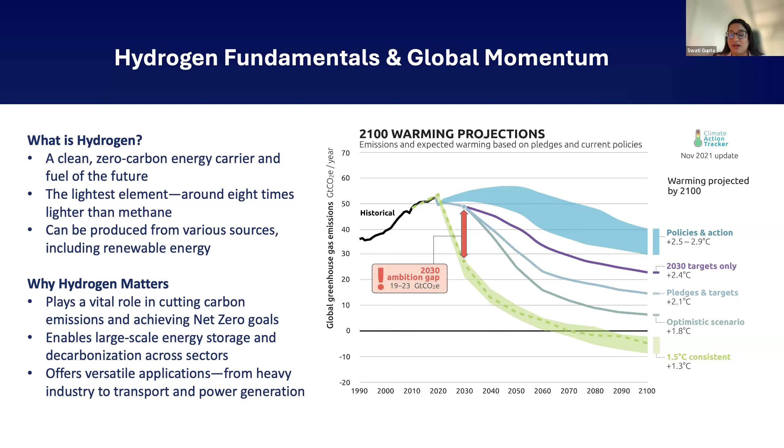Furthermore, hydrogen will offer versatile applications as well, ranging from heavy industry, transportation, and power generation, which actually makes hydrogen a key component in the transition to sustainable energy.

So the global stats is basically from the latest Hydrogen Council report, which was released recently in 2025. I think it was August or September.

That report talks about clean hydrogen, and if you look deeper, clean hydrogen is a mix of renewable energy and renewable hydrogen, which is what they're calling green hydrogen. They're actually calling it renewable hydrogen for some reason. Then the other part is blue hydrogen, which is called low carbon hydrogen. That's basically still using fossil fuel, but doing CCUS.

So there's a lot of investment committed by 2030. Why 2030? Because most countries have a net zero target by 2030. We're already in 2025, so we're not far off.

There's 500 plus projects at FID, under construction, or operating. This report is quite interesting, so I suggest everybody interested in hydrogen go through it. There's 6 million tons of capacity, and out of that, 1 million tons is already online, so that's some achievement. There are also about 50 plus projects which are cancelled or postponed, which is important to note, and that's due to market policy - we can cover that more in the Q&A.

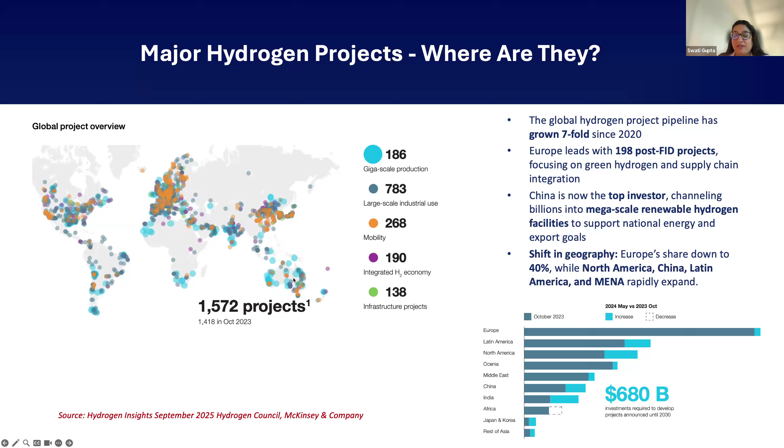So what are we looking at in terms of capacity? How much is in clean hydrogen projects? What does it look like? For hydrogen and CCUS, we talk about tons. Those from the oil and gas industry are used to cubic feet or barrels, but for hydrogen it's measured in tons.

Now, these clean hydrogen projects are what they call FEED plus projects. What is FEED plus? It's after the front-end engineering design is completed, which shows that most of them could be going online - we don't know, but there's quite a high chance. So the clean hydrogen market is seeing its first wave of mature projects, with FID, under construction, and operational investment almost surpassing 110 billion across 510 projects. So that's the stats.

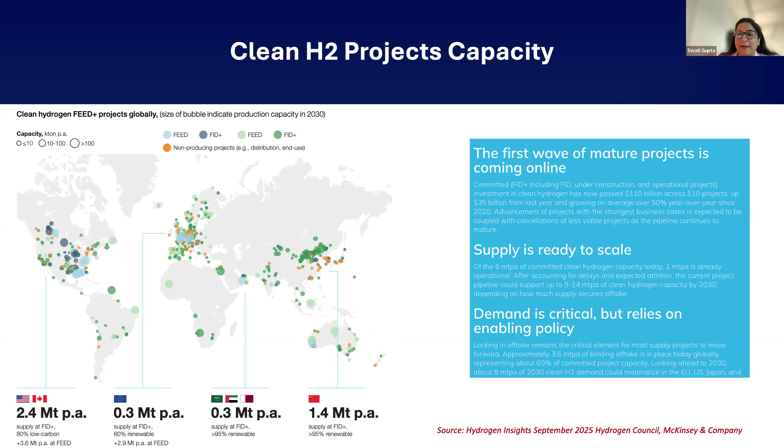So that was just a very brief introduction from the stats from the council report. Now we're going to move to different types of hydrogen. I think most of us would know, but just to give a little flavor of the different colors here.

Gray is the steam reforming of natural gas, which is the most common and the cheapest. It's produced from natural gas through steam reforming, but it emits high levels of CO2 because it's using natural gas burning. Blue is also exactly the same, but we capture the carbon using CCUS, and it's also called low carbon hydrogen generally.

Green is the electrolysis using renewable energy, and there's no emission—a true clean energy source. Either it has to be solar, wind, or any kind of renewable energy, it doesn't matter. The production cost is high. Why? Because it's dependent upon the renewable energy cost. So that is why it's high.

Black and brown is gasification of coal, very harmful. And then we go to pink, which is nuclear energy, which is also referred to as purple or red hydrogen. And then turquoise, methane pyrolysis, and that's emerging now, emitting no CO2 and producing solid carbon.

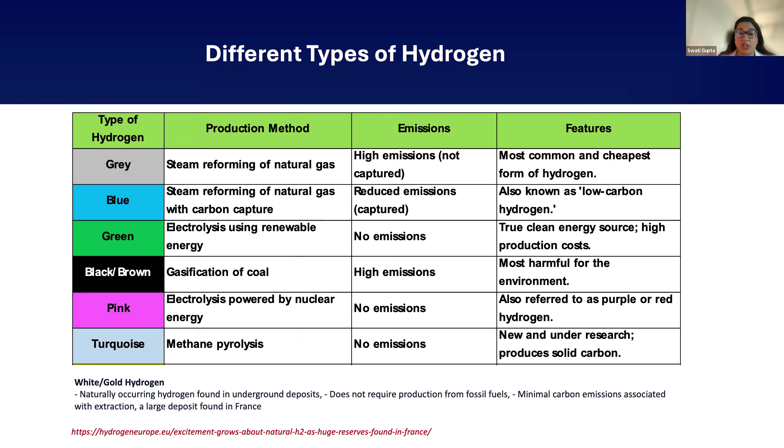And last but not least, gold hydrogen or white hydrogen, which you've probably been hearing a lot about. That is geological hydrogen, which does not require production from fossil fuels, but extracting that hydrogen will still require some form of energy, and if it is fossil fuel, then it is not really zero carbon emission. There was news about huge reserves in France, which have been making news for the geological hydrogen. Many universities are working on this.

Okay, which basically takes us to some of the storage challenges here. Why are we talking about hydrogen storage, and why is it important in the whole value chain? When hydrogen becomes the fuel of the future, it is very important to understand that it will have subsurface, surface, and regulatory market challenges, because it will be a fuel which will be stored, and it will have its own challenges on the surface, infrastructure, and the regulatory market. So we will touch upon this slide a little bit later.

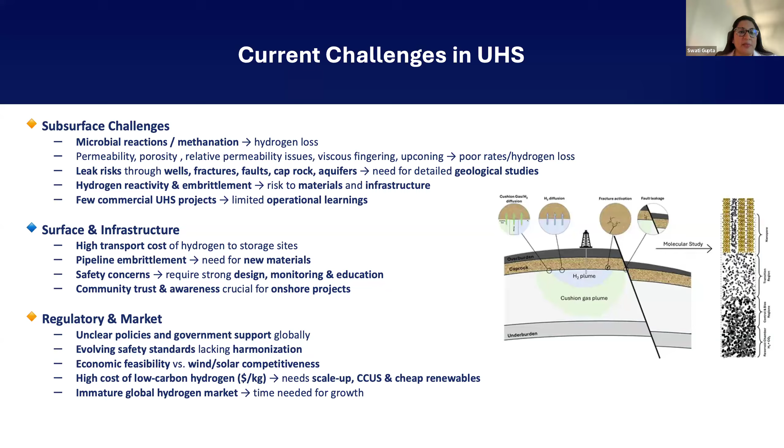Let me go to—sorry, I'm just going to look at this. Okay, sorry, I think there is some mismatch of my slides here and there, so I'm just going to go to the industrial use of hydrogen first. So from hydrogen, we understood that it is a fuel which has been used in many sectors, and it plays a vital role in several major manufacturing and industrial processes.

In ammonia production, it serves as a key feedstock for fertilizer. So that's why you hear a lot about ammonia production, and now ammonia is becoming a fuel for some of the shipping industry, and there's a lot of research going on. This is all an active area of research, by the way, since the economy will be dependent upon hydrogen—that's the assumption, so there's a lot of work going on. But saying that, ammonia is still mainly used for fertilizer production. That's the main industry.

Then again, methanol production: hydrogen is combined with carbon monoxide, and it could be carbon dioxide, and then it is used to produce methanol, which is a versatile chemical used for manufacturing different acids and biodiesel and things like that. And then in the refining industry, hydrogen is also used to remove sulfur, in what's called the hydrodesulfurization process.

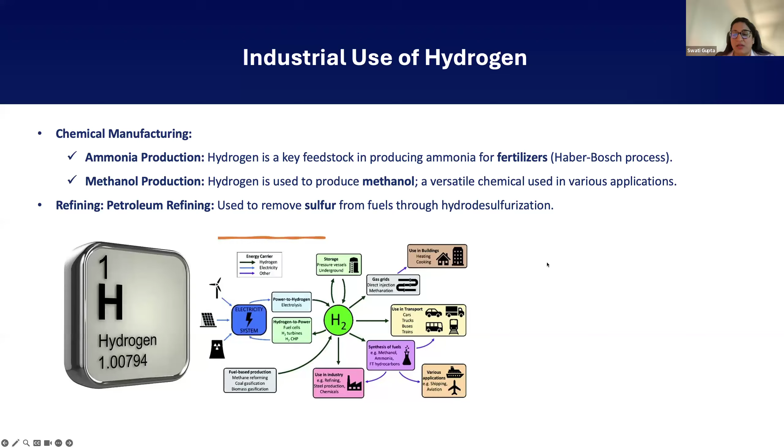Low carbon hydrogen is a slightly newer industry, and it is increasingly being adopted for various sectors like the automotive industry and fuel cell industry. You're probably hearing more about the testing of hydrogen fuel cells. Why is that? Because if you use a fuel cell powered car, it will only emit water vapor, offering a zero emission alternative to the conventional vehicle where there's high emission.

For example, there are hydrogen fueling stations. We've been seeing that hydrogen buses are planned to start in Abu Dhabi at the end of 2025. I'm not sure how that project is going ahead, but there was a lot of announcement on that. And for example, the Toyota Mirai is another car running on hydrogen fuel cell. Mostly in every sustainability conference you go to, you will find these examples of hydrogen fuel cell, and you'll see a lot more usage of fuel cells.

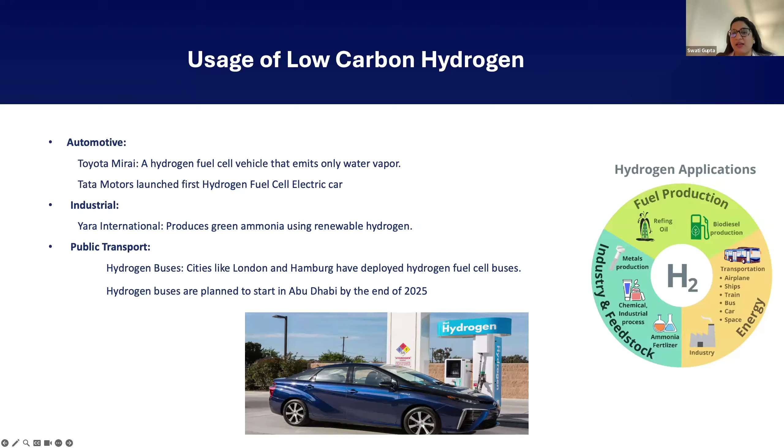But again, it's very expensive. It still needs to be scaled up and compete with traditional fossil fuel. So it's early stages, but it's the future.

Now, just a quick one on producing low carbon hydrogen. I'm not an expert in this, but the production of low carbon hydrogen involves using electrolysis. We are not talking about traditional hydrogen production, but the electrolysis of water, which is a very energy intensive process. The water is split into hydrogen and oxygen using renewable electricity, such as wind, solar, and hydro.

Basically, we are splitting the water, and it's fully sustainable, with zero carbon emissions. There are different types within electrolysis: alkaline electrolysis, proton exchange membrane, and solid oxide electrolysis cells. This is an area of active research in terms of reducing the cost of electrolyzers. Over the last few years, electrolyzer costs have gone down almost 50%, because of spending on technology advancements.

Low carbon hydrogen can also be generated by biomass gasification. So what do we do there? We take organic materials which are converted into hydrogen using heat and oxygen, and produce minimum CO2 if sustainably sourced, depending upon where the electricity is coming from. So that can also be an advantage to make it carbon neutral if we are sourcing the electricity. I guess the key here is the source of electricity or the source of energy.

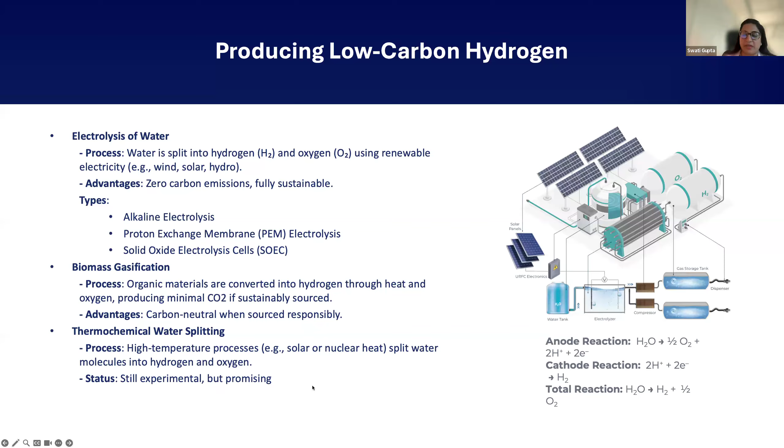Then another one is thermochemical water splitting. Again, we are splitting the water, but using high temperature processes, solar or nuclear heat. This still uses very high temperature processes, so there's a very high amount of electricity and energy cost. It's still experimental, but it's also something we are looking at.

Now we have moved to surface hydrogen storage solutions. What are the different options here? Just like oil and gas, the question is why we cannot store it on the surface. Yes, you can still store hydrogen at the surface, and these are the solutions, but we will take you through the details of why that's not feasible and very costly.

So compressed gas tanks have been used, which is pressurized hydrogen stored in pressurized vessels. They are common in mobility and small scale industrial use. Then hydrogen is also stored at cryogenic temperatures, which provides a higher energy density, ideal for aerospace and long range transport.

Now we will talk more about why liquid hydrogen is needed. Just like LNG, we can do LH2 here, but it requires very, very low temperatures, which actually aren't available yet at the cryogenic temperatures needed, because it's really low.

Then another form of storage is liquid organic hydrogen carriers, LOHCs. What happens there is the hydrogen is chemically bonded to some organic liquids. They are easier to handle, but again, they require energy for release, so there's not really that much energy conservation there.

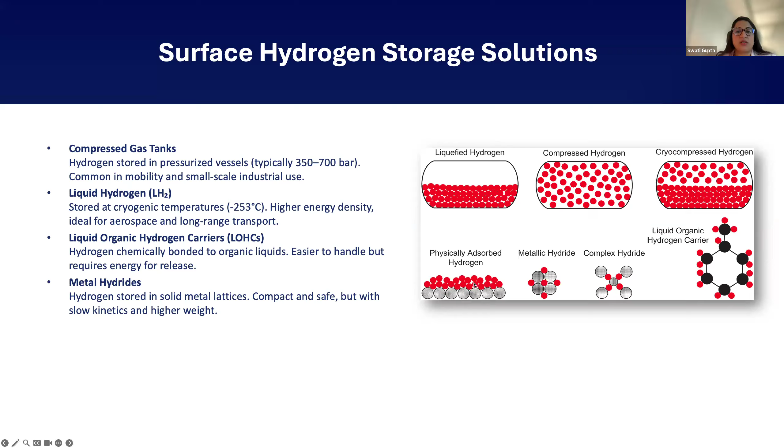So in general, what are we looking at in terms of challenges here in terms of hydrogen storage? Because this webinar is about storage, we will talk more about that.

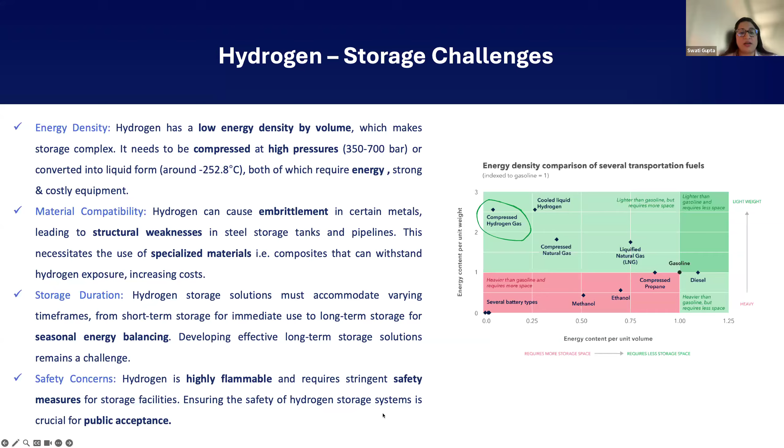So this is the beginning of underground hydrogen storage. One of the solutions offered is storing hydrogen underground. Why? Because of the issues we talked about before, the low energy density, and because there is so much space in porous rocks and subsurface salt caverns.

Again, this is an area of still active research. There are not many commercial solutions available, but there have been a lot of examples in the UK, US, and Germany where they have proven this technology, though it is still very new.

Salt caverns are artificial cavities within salt domes, and you have to mine them to create them. These are called non-porous storage, and they don't come with the issues of porous rock storage, which we'll talk about.

So what happens in porous rock storage? Porous rock storage mainly involves three things: depleted gas fields, aquifers, and depleted oil fields. What happens there once we have emptied the oil and gas? The porous rock is able to store it safely, because oil and gas have been there for ages.

It is a very similar experience to what we have from natural gas storage, mainly used in Europe for energy balancing. In terms of aquifers, they are normally deep aquifers.

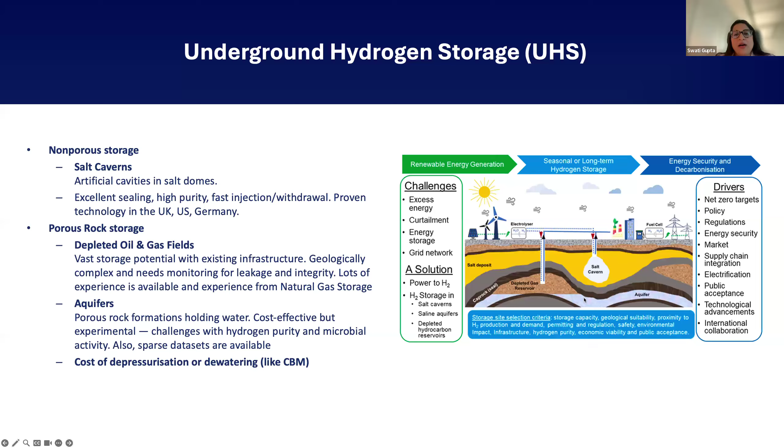So in terms of different storage sites, salt caverns offer medium capacity and require low cushion gas. We didn't talk much about cushion gas, but it's required to maintain pressure, and that is something which we will not be using ourselves - so we need to put in cushion gas. It's almost like a CapEx investment into any storage project.

The capex is very high for salt caverns. Why? Because it needs to be mined first, and mining requires a lot of water. So it's not necessarily green, because you need to use high energy to actually mine it first, and then you have to create the cavern before you can use it.

This maturity is proven, and site availability could be a risk. In terms of depleted fields, the capacity is very high, so it is normally recommended for seasonal high storage rather than quick storage. I will talk about that a little bit later.

Cushion gas will be medium, not as much as aquifers, but capex will again be medium, depending on how many wells, what the facility is, and whether we are onshore or offshore. But then there are quite a lot of risks, which we'll talk about. This is emerging maturity, because we don't have a lot of examples there.

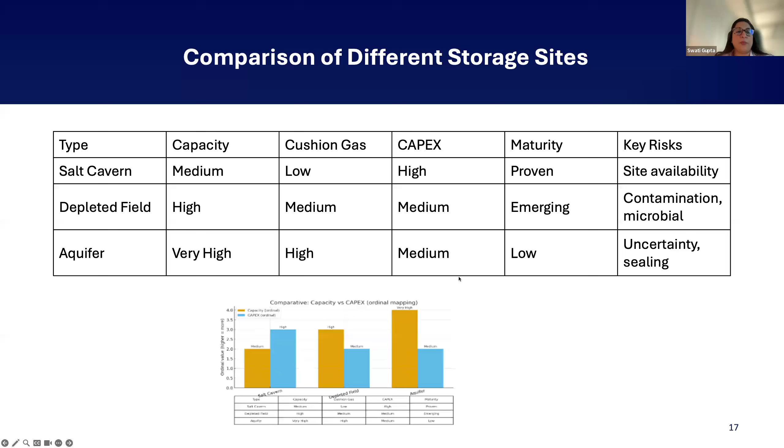There's a lot of uncertainty and sealing issues. We don't want the gas to come up from the aquifer and basically contaminate the water table.

Okay, with that, I think we are going to move to hydrogen's role, UAE's role in hydrogen. We talked about the Hydrogen Council, now we're going to talk about this. So the National Hydrogen Strategy 2050 is set. This is actually a picture from the National Hydrogen Strategy from the website of the UAE Government. And it does talk about 1.4 million tons per annum of production of hydrogen, low carbon hydrogen by 2031, which is actually quite good.

That includes one just green, which is basically from solar, and 0.4 blue hydrogen, which will probably use gas. The longer term targets are 2040 at 7.5, which is actually again quite high, and 15 by 2050. So we're seeing that the hydrogen industry is really going to grow here.

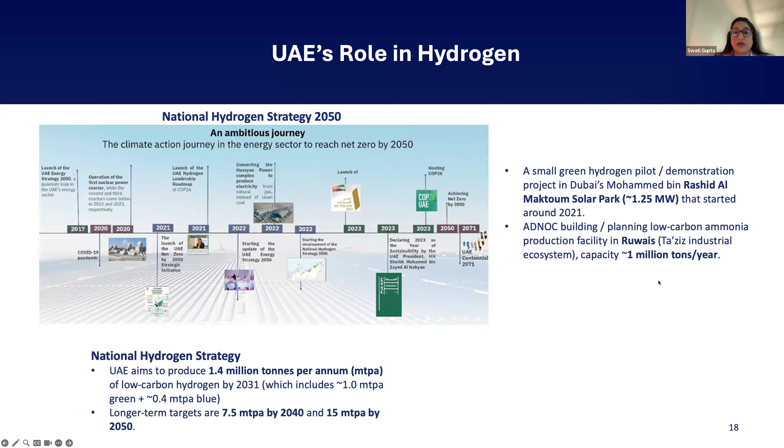There are some examples. Dubai's Mohammed bin Rashid Al Maktoum Solar Park started around 2021 - that is one of the examples for the pilot. And ADNOC building an ammonia production facility in Ruwais is another example, with a capacity of about 1 million tons per year.

Okay, so with that, I'm going to move to my case study, which is what I did. I actually performed the work on this project. So the UK hydrogen industry is committed to net zero by 2050, which is probably what most countries are saying, and I think they've set this up in one of the COPs.

The central government is aiming to reduce energy consumption by 2030 by 30%. So hydrogen was deemed to be a most important part, but with the last government change, there have been quite a lot of changes in that as well. So it's still not clear - I think the UK industry is actually a little bit behind on their hydrogen targets.

So the work we did was based on hydrogen being produced in Scotland, and the idea was to store hydrogen in one of the onshore fields. We looked at site selection of 10 depleted fields and aquifers, and depending on the feasibility work and modeling work, we will select one or two of them to go into the next stages. So it is a high-level feasibility work.

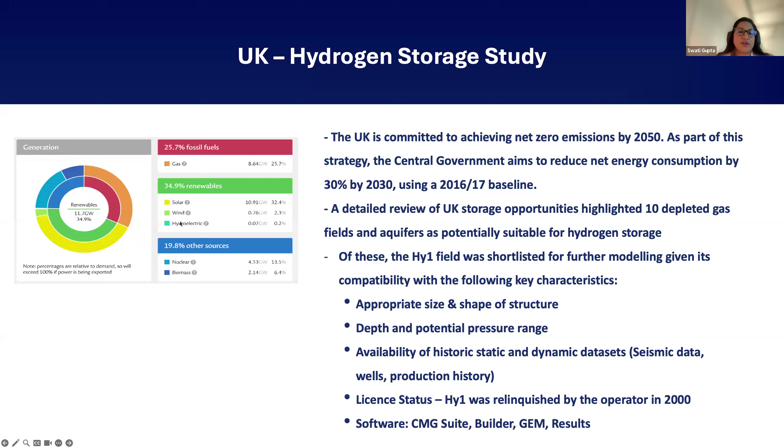The solar, wind, and hydro are produced, but then they cannot be transmitted, and not a lot of battery storage is available. That is why we are looking at buying the cheaper wind and solar to then convert into hydrogen, and then pump hydrogen into the storage sites and produce it when required.

In terms of electrolysis and thermal generation rates, for this study we were looking at the national grid. Obviously it is connected to the national grid - electricity is taken from the grid, which is used in electrolysis. It's then taken into hydrogen storage, thermal generation, and then it goes from the site whenever you need it - going to thermal generation and back to the grid.

So the idea was, today's presentation will not cover the entire study in terms of surface facilities and how it will be integrated to the grid. But the idea was really taking from the grid, making electrolysis, and then moving it to the grid.

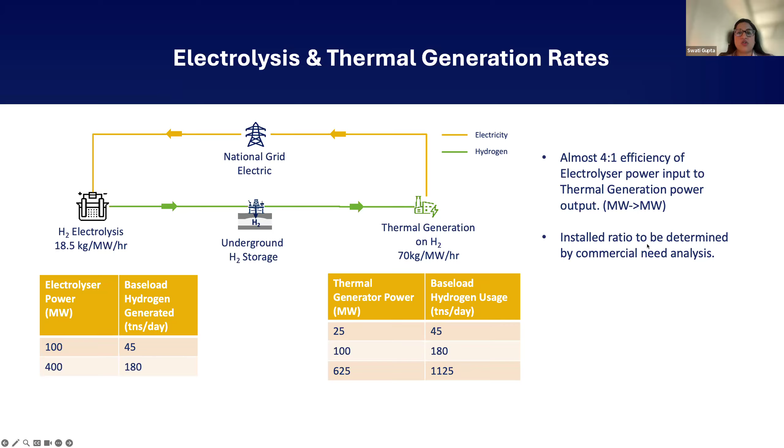So these are the boundary conditions for some of the modeling work we did about how much power we are looking at and what should be the tons per day, because that is what we are modeling for. So for 100 megawatt, we were looking at 45 tons per day. That is the assumption, and 400 is basically 4 times. Similar for the thermal generation, so it's about a 4:1 efficiency ratio of electrolysis to thermal generation. So you can imagine how much megawatt to megawatt conversion that is.

So in terms of the study, we are starting with the screening of some of the fields, which is what we've started, building the models, looking at some of the history matching to make sure that the work previously done by the operators is correct. Then moving into some of the storage scenarios, trying to drill wells, very similar to how we do in oil and gas developments. And then moving into the scenario building of how many wells, what are the rates, very similar to how we do in oil and gas, where we are looking at what is the output and what is the input.

So remember, the operator is trying to maximize the output by doing some feasibility work in terms of cost, so to keep the wells to a low level, and trying to also see other things from the subsurface, like what is the impact on the aquifer or the permeability or some of the subsurface issues here, because we are actually storing it in the subsurface here, and we have not done that really for pure hydrogen. We have been doing actually part of the town gas.

Okay, so then we are looking at some of the risks, and then the project will then move into how can we manage those risks. And then we are also looking at the facility. So this is the sort of cycle we were looking at.

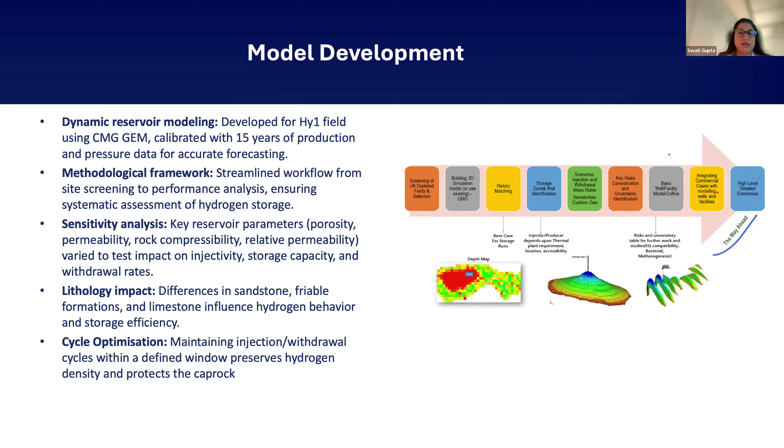So in terms of sensitivity analysis, we are looking at different sensitivities of the key reservoir parameters like porosity, permeability, rock compressibility, relative permeability. And we will be doing that to test different things, like porosity and permeability for injectivity, storage capacity, withdrawal rates. Lithology impacts and cycle optimization are very important, because just like oil and gas, one shoe does not fit all. It's very similar here - one field will show very different results, and it's very important to understand that.

So in terms of storage suitability, Hy1 field simulation site was the one we selected out of the various ones, which we'll take in the next slide. We'll talk about what is important here, that the field should be able to have some decent storage capacity. In this example, we had about 15 to 20,000 tons we were looking for. It's a smaller field, the feasibility.

And then we were also looking at some of the injection withdrawal rates, about 300 to 200 tons per day, which we had to align with the grid scale storage requirements at the time. So obviously we need to know how much is the requirement at the time.

Well placements, we are looking at a few wells. So actually one of the wells we were re-entering - the existing well was re-entered. Then we are also looking at some of the trade-offs: high rate, shorter cycles, but lower efficiencies, versus low rate, better containment. So lots and lots of sensitivities there.

Those are important to do, and that is how we are looking at whether we can do short cycles as well as long cycles for this field. And depending upon each field, that will also change. The operational optimization is also very important.

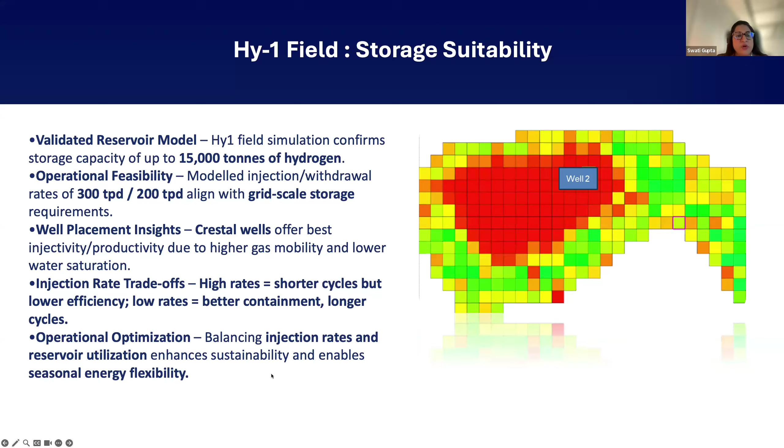So in terms of the 10 sites we looked at, there was depleted field, aquifer. Out of these, 4 went into the detailed study.

So these are the different works performed. We did the full UHS feasibility work, and then key areas of study was cushion gas, looking at cushion gas requirements, well integrity, reservoir performance, reuse of the existing infrastructure. Because one of the major reasons why we are thinking of this hydrogen storage in an existing depleted old field is to avoid the abandonment cost. So that is a key important thing.

And for the simulation model, we have created a simulation GEM compositional model on the CMG. In terms of the initial pressure, we had a decent pressure range, 250 bar, which basically means that we will be limiting that to avoid the leakage risk, relative to the other screened sites.

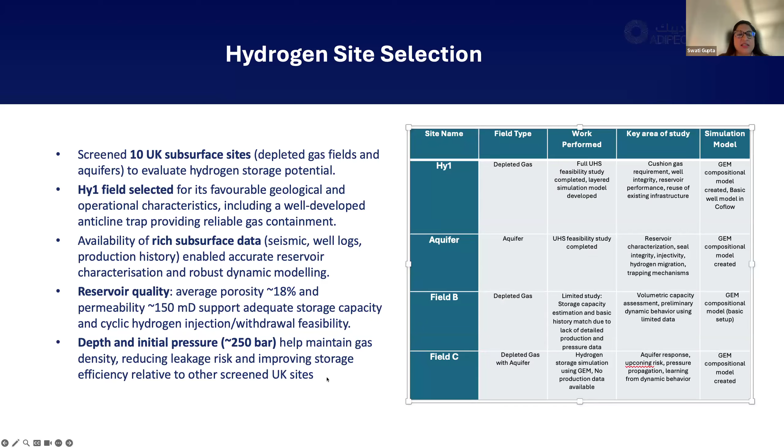So we will see why. One of the important things in simulation modeling is keeping it very simple at this stage. You can see it's a layer cake model. Now in oil and gas, it's very complicated because we want to model it in detail, but at the very early stages, we do look at some of these layer cake models.

We were lucky to have some of the fields, actually most of the fields we've selected, using a simple layer cake model approach. Obviously the faults and everything are there. We used this because we want to do lots of sensitivities and keep the runtime very low. So that was the reason why we did that.

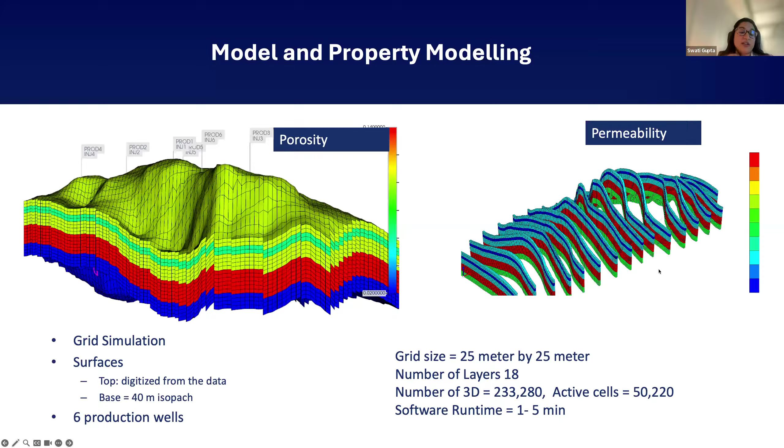This is the porosity and permeability. You can see the permeability range, for confidentiality reasons I can't say exact numbers, but it's very good porosity and permeability in this field compared to some other fields we looked at in the aquifer, which was low. There was a sensitivity done for permeability and porosity.

Well, actually, I am displaying it here. We are looking at some 150 millidarcy, which is good compared to the aquifer. So why are we choosing this high one? It's chosen because it does behave like a tank, making it suitable. We'll see in the next picture why.

The P by Z plot is straight, and it's got extensive data, so that is very important, and reliable simulation data for cyclic injection and withdrawal. Because remember, if it's a small tank, we will be doing a lot of cycling, which means withdrawing, injecting, and withdrawing, injecting, withdrawing.

Just a quick one on the pressure history, not going into details, but this is the history and the model, and you can see a very good match here. Before conducting any storage feasibility work, we look at this. This is part of our storage feasibility workflow, which I've talked about. In this one, we can see that over 20 years, it behaves really well.

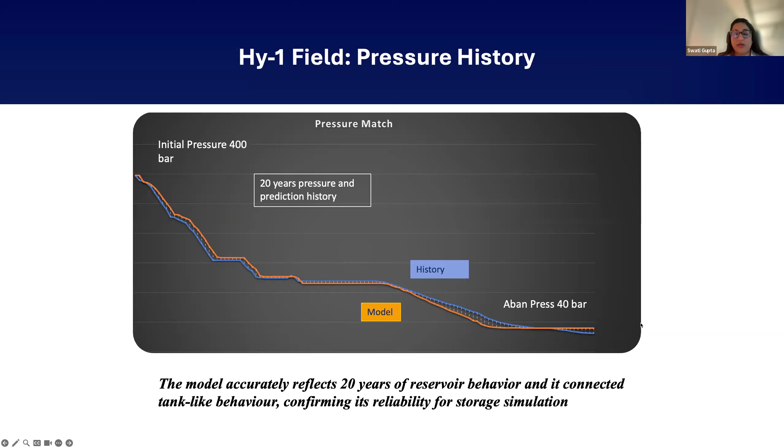Okay, in terms of the storage runs now, we will be looking at some of the sensitivities. A key sensitivity is the new wells being drilled in that field. If it's offshore, the well cost is doubled, so onshore it's a little bit less. So what are we seeing here?

This is a plot showing gas volume going up on the y-axis with time. This is an ideal storage single cycle plot for this Hy1 field, where we are injecting, it goes up, then it stops, where the pressure reaches the limit we have given for the cap rock. Then we produce, and while withdrawing, we see with 1 well, 2 wells, and 3 wells sensitivity, the difference between the profiles of withdrawal.

Withdrawal is the most important because that's where we are promising our customers a profile. So you can see here that 1 well or 2 wells is probably the best. 2 and 3 show exactly the same answer, meaning the maximum wells we wanted here is basically 2, not 3. But when we went ahead with the development plan, we went for 3 because we wanted 1 well as a backup.

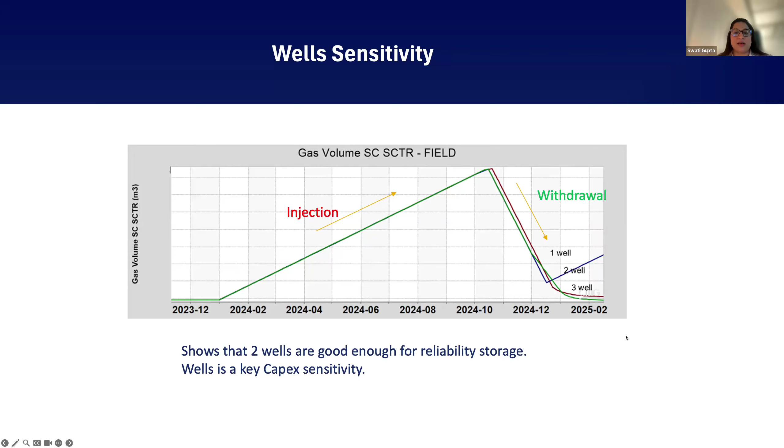Another very important thing here is to integrate the data to the surface and well models, because we can do the subsurface, but what happens at the well? How is hydrogen going to behave at the surface? We use CoFlow well modeling, part of the CMG suite, and we were quite confident because hydrogen-specific correlations are available, and they've done some good work there. This was 3 years ago, and I'm sure there are more advancements now.

Actually, for some of the fields where we had aquifer storage, we saw a big difference. Why? Because of the water. So water is a clear no. We should not be producing any water here. We will talk probably more about methane.

That's another topic, we will be co-producing methane, and you can see the gas rate profile here. This is a typical sort of curve. The THP is important, reservoir pressure is important, but the surface facility - we had some idea when doing the feasibility study of some of the grid pressure, and we had to integrate that because designing that facility is important if hydrogen needs to be separated, especially in the case of co-production of some of the in situ gas. In this case we were producing some of the methane present, and for that we need some separation facility, which also brings its own challenges.

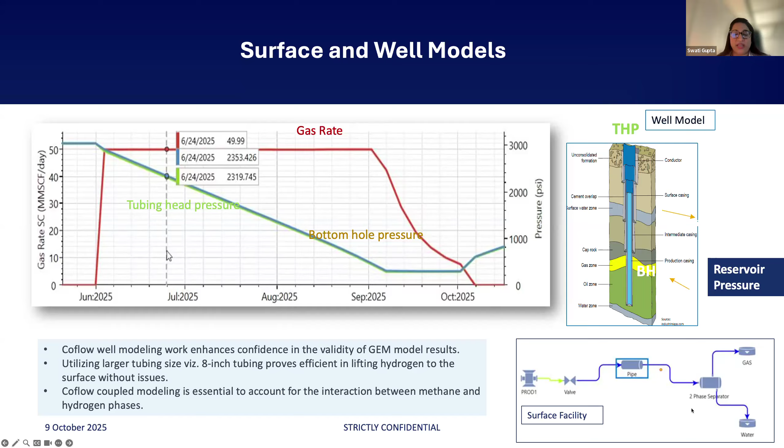So results and conclusion - I'm not going to go through each and every item here, but really the Hy1 field can store 15,000 tons. This is what we can prove with good rates, which is what was required by the customers of the hydrogen. And we did that by using this approach of integrating the data from the simulation to actually surface.

And we looked at some of the risk management and caprock integrity, aquifer interaction, residual methane. We did look at some of them, but the next stage will be to look at further detailed work in terms of the rock interactions and some of the hydrogen specific surface facility upgrades. But what we can look at this stage is the big drivers: how many wells, study of the cushion gas, which is basically a big capex item.

And then we are also looking at, in this paper, which we'll probably see if you come to ADIPEC, how we can actually apply the same approach to some of the UAE mature fields.

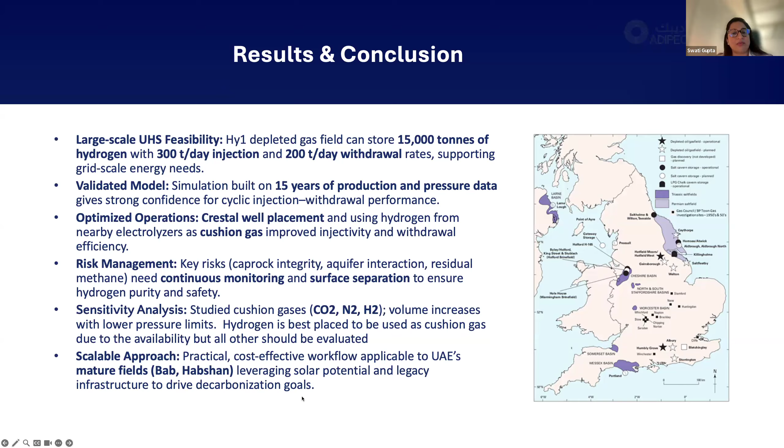Okay, this is a very quick one on the storage sites and the cost, which basically shows that we can calculate a levelized cost of storage. That will be looking at the capex, and capex is very much dependent upon what kind of reservoir we are looking at - whether it's a depleted field or aquifer - and the main drivers will really be geology, depth, how much hydrogen is there, because if we are co-producing some of the existing fluids, then the cost of removing those goes up. So really the cost is a very complicated one, and what I wanted to say here is that it's a complicated one.

And when we look at $3 per kilogram, things like that, that's more on the production side, and again that is very much dependent upon the electricity. We talk about that because hydrogen as a fuel is directly compared to the fossil fuel.

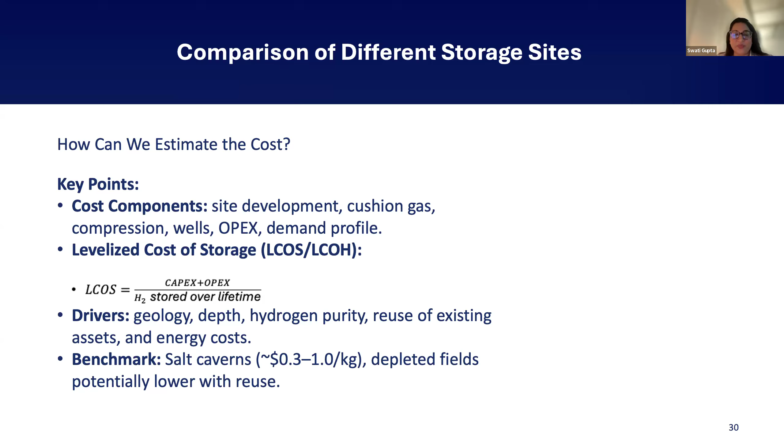Okay, so I think I have finished here. I think there were a couple of slides in the beginning - I don't know if we have time, Abhijit, to go through.